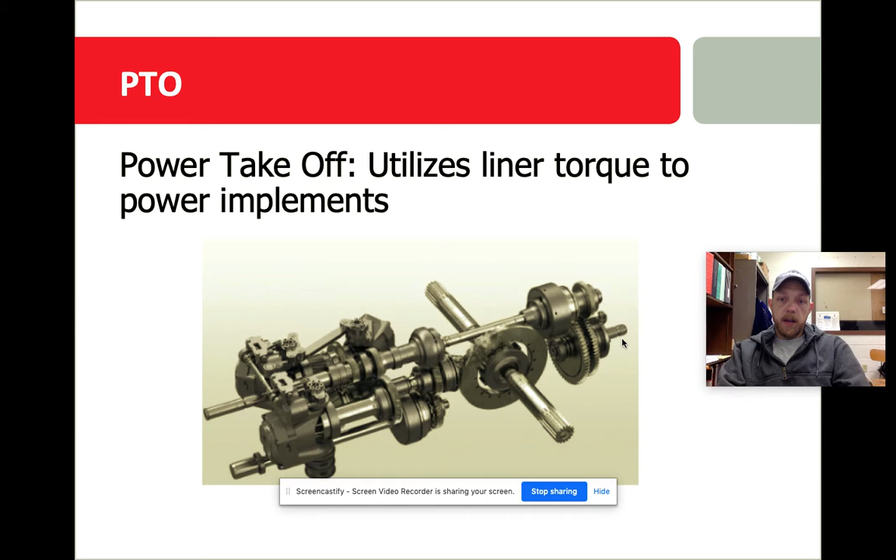tires. And then there is a clutch pack here that allows us to engage and disengage this shaft that sticks out the rear end of the tractor, called the power takeoff. We'll talk about the history in a minute. So, that's just a very brief overview of what we see. There are two classifications for

PTO types. The first is mechanical, and we call this a clutch type because you actually have to push the clutch in order to pull that power takeoff lever gear into engagement. So you're manually going to push in on the clutch, pull that lever back, and then ease off the clutch, and that's going to start the rotational force of the power takeoff.

So tractor here, we've got a 6610. That was standard equipment. They call that clutching system a two-stage. So if you wanted to stop completely, you're pushing all the way in on the clutch. If you want to just operate the PTO, you're going to push about halfway, and you can feel that clutch gear move in and out.

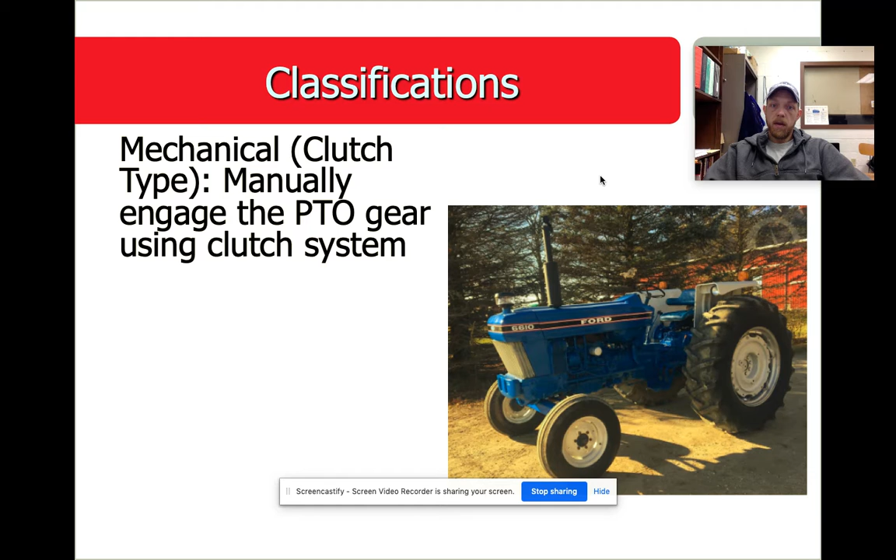The next type is a hydraulic clutch system. When you see tractors advertised, or when people talk about tractors, they might ask, does it have an independent PTO, or has it got live power? What they're talking about is the ability to engage and disengage that power takeoff without having to clutch. So it's separate from the transmission.

It actually uses the hydraulic system to power the PTO, but we still call it part of the final drive because it's all in that rear axle housing. We've got the 6610 again. Ford had this as an option before it was made into standard equipment on this model tractor. So, this is when we would be asking, does it have mechanical PTO or is it live power? That way, there's a separation there, and there's a greater value for some folks as well.

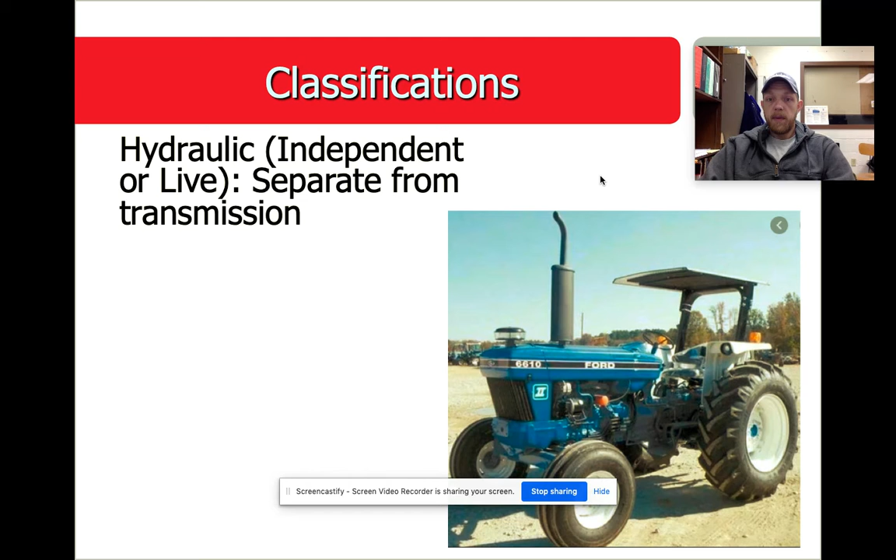When you have the ability to not mess around with the clutch when you're baling hay, when you're running a disc mower, just to engage and disengage that PTO, it can streamline the process, and it can be very handy on the operator's end of things.

The early mechanical PTO, one thing to keep in mind if you are new to operating equipment, would just use that linear power coming off of the engine through the transmission and then to the PTO. When we would use a rotating implement, like we see here, this rotary mower, bush hog, even though you turn the PTO off, that mower blade is still spinning, and it is actually causing power transfer to go through the PTO shaft on the implement back to the tractor, and it can cause forward movement in the tractor.

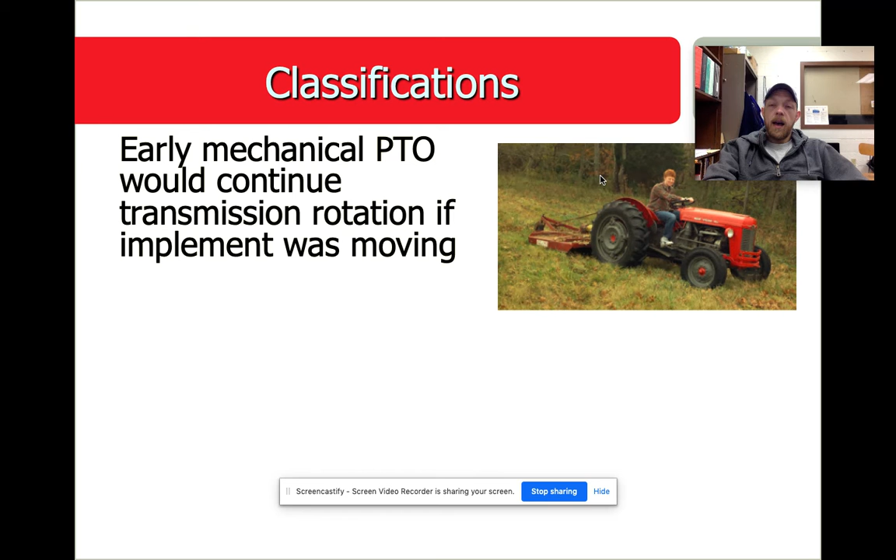So before people realized that this was an issue, there were a lot of wrecks and a lot of injuries because guys would get to the end of the row, they'd shut the mower off, and the tractor would still move. So in the 1960s, we had this invention called an overrunning coupler. And what it does is it just halts that power. So it allows for that PTO shaft and the blades to continue spinning, but it halts that power from going back into the power takeoff of the tractor and keeping it moving forward. So it's just a safety mechanism.

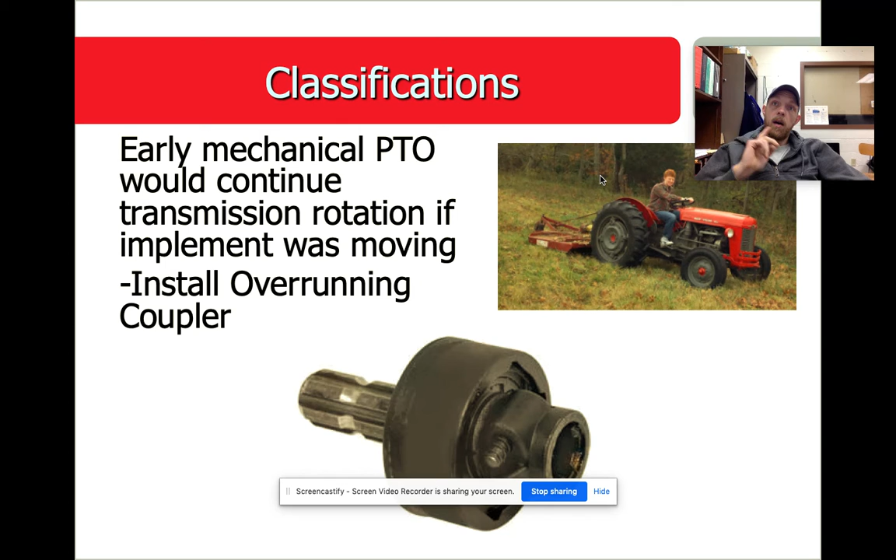Again, if you're ever operating an older tractor, like this is an old Massey Ferguson 35, the old Ford 8N, some of those old John Deeres, they didn't have that technology in place. So you really had to be on your game if you were using an implement that was going to have what we call PTO runout, where it's going to keep on moving even after you shut the PTO off physically.

When we talk about the second classification of power takeoffs, they are separated out by speed. So the speed just determines the rotational speed that is needed for that particular power takeoff shaft. So what does that equipment need to rotate at per minute in order to run optimally? The first is called 540. So again, when we see tractors advertised, especially some of those coming out of the late 70s and 80s, the power takeoff that you had visible was an option.

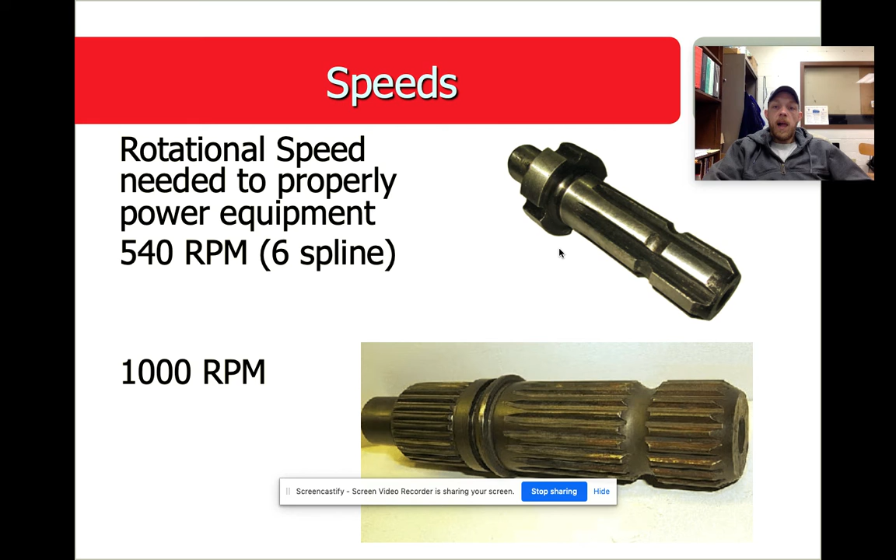And it was determined that the 6 spline was efficient enough, effective enough, strong enough that this is what we need to kind of gravitate to in the industry. So 1,000 RPM was invented, I think, in the late 60s, and we just saw that as a need for bigger pieces of equipment that need to run faster, that would have to utilize that shaft. So we would actually see tractors, and you can see here if you look close, there are 2 shafts. So you could operate that engine speed depending upon what that tractor needed.

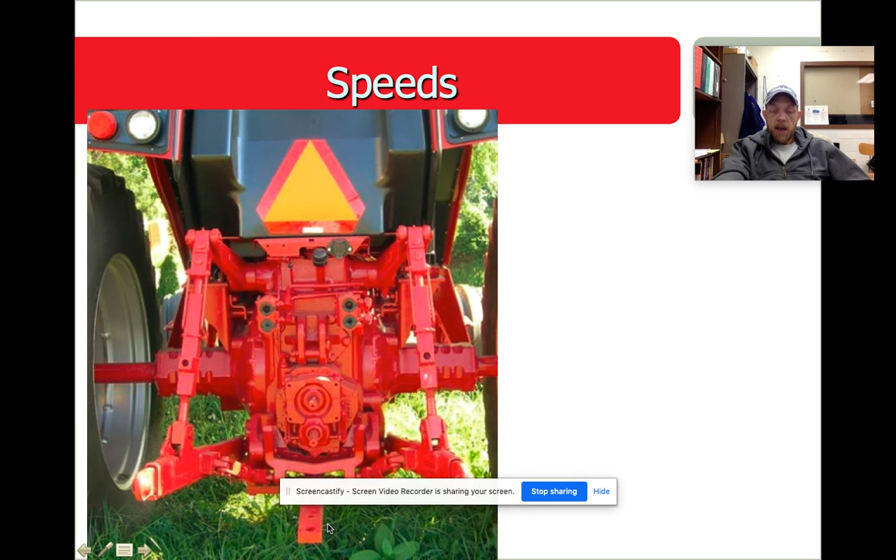So this is a mid-60s International model, and it's just got the 2 of them there. And when you turn the PTO on, both of them run. They actually are supposed to have a cap, so that one of those shafts, if it's not in use, would be capped. That way you wouldn't have this safety hazard there just rotating freewheel while you're actually using the other shaft. A lot of people would just take that off and throw it away, though.

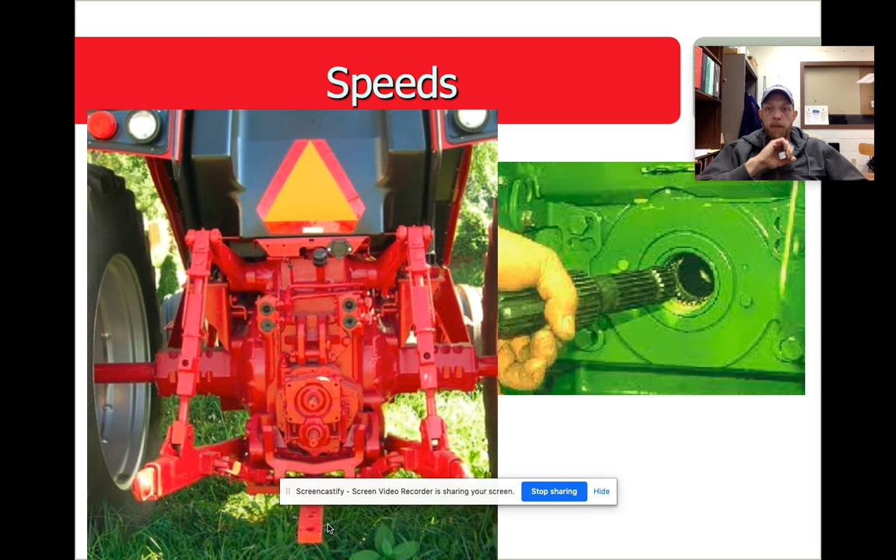Then someone got smart, and like a lot of the advancements we see, John Deere was the first to actually make what they call a dual PTO shaft from the single shaft orifice. So you would remove a clip and you could actually pull that shaft out, flip it over, and stick it in. And technology got so good that today a lot of your middle tiered tractors, like your 6,000 series John Deeres, right around 75 to 150 horsepower, they all come with this technology.

And there's a sensor now in that final drive of the tractor that will tell you if you have the 1,000 splines out, it's going to engage at 1,000, and it'll tell you on your tachometer what RPM range you need to be at to actually have 1,000 RPMs coming from that shaft. And if the 540 end comes out when you turn the PTO on, it tells you that it's 540, and it tells you on the tachometer where you need to operate that engine for 540 PTO RPMs.

So we've come a long way, but without this technology, powering implements would have to be done through another means, whether it's ground driven, where mechanically the wheels turn and then it operates the mechanism of that particular implement, or hydraulically. So PTO, a very valuable component of tractor operations.